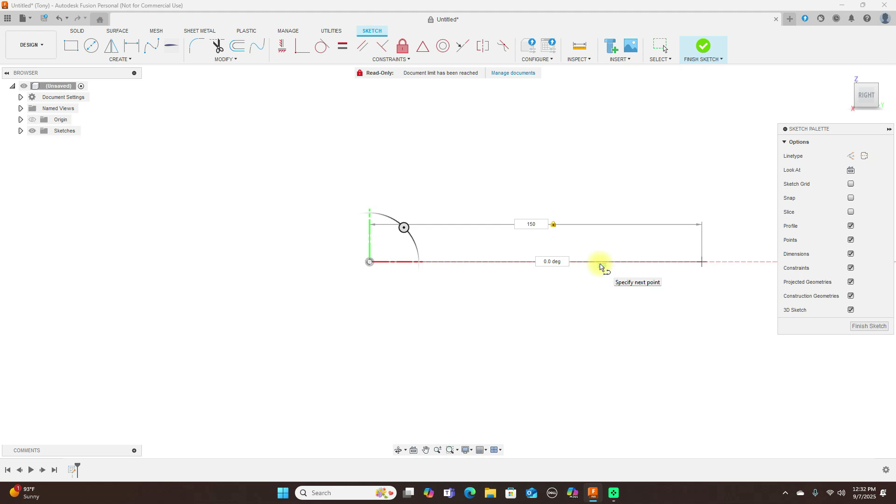Now, I don't know what's going on here, why the line is not staying here for me. I just figured out that's why—I forgot to hit the left mouse button. Sorry about that, but anyway, let's continue.

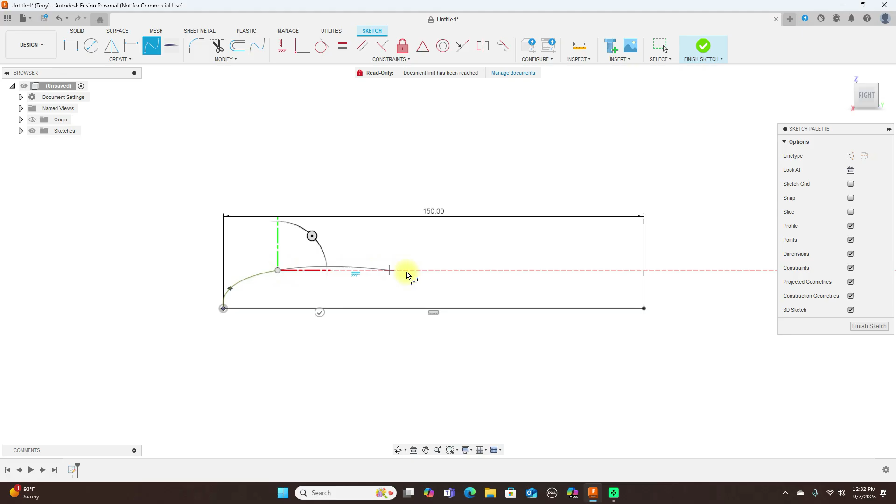If you have the profile you want to use, go ahead and use your wing profile. Like I said, this is just an arbitrary one to show you guys the easiest way to do this. Okay, we have our wing profile. Go ahead and finish the sketch here.

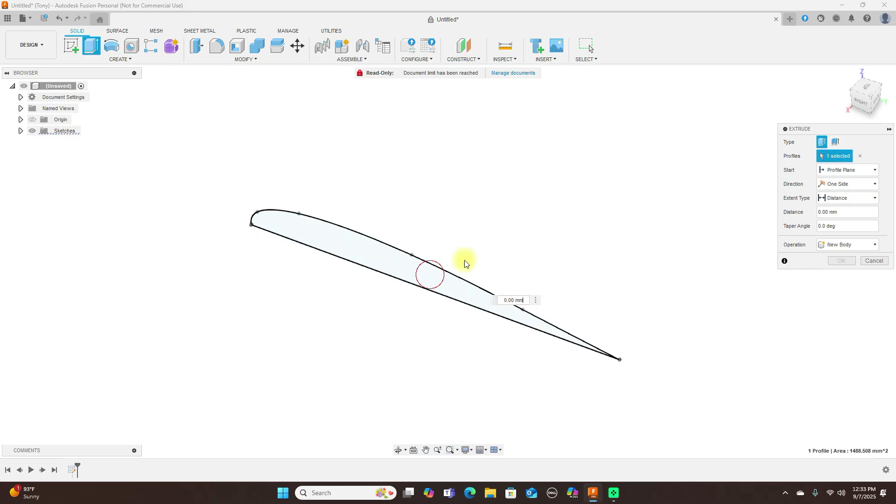Then we're going to go ahead and extrude this. It was already selected, but no worries. I want to make this the same thing, 150 millimeters. Okay, here's our wing. Just that simple.

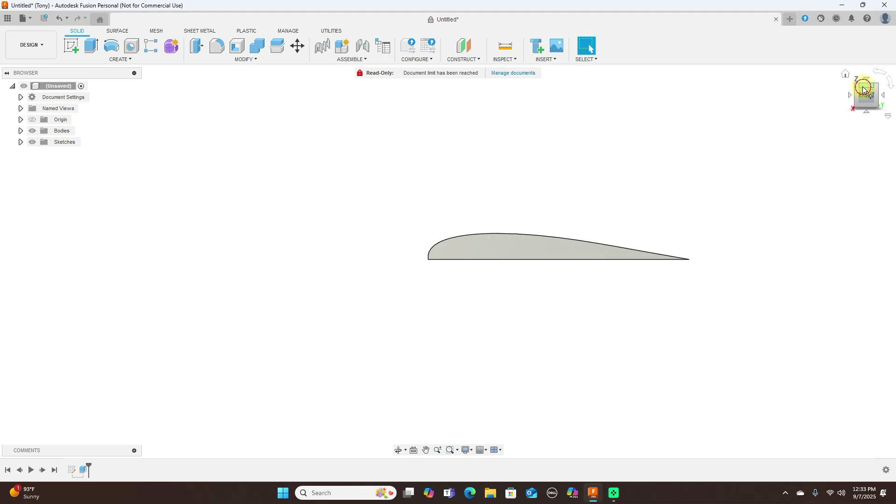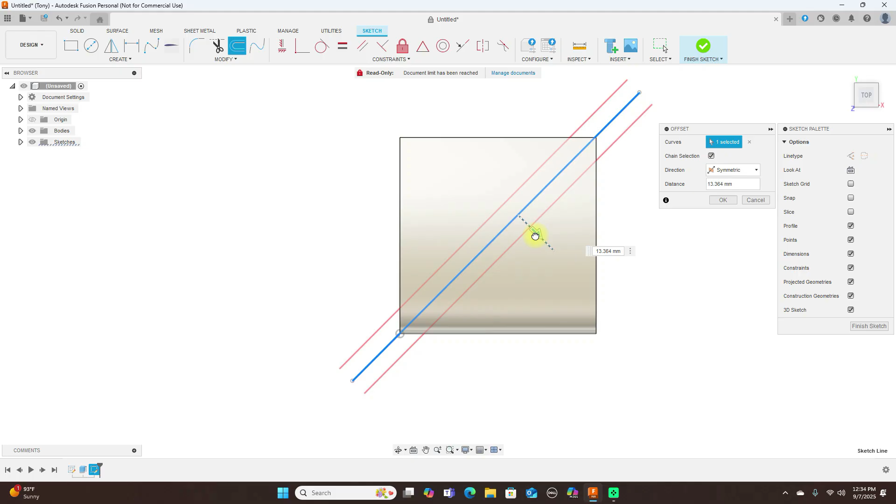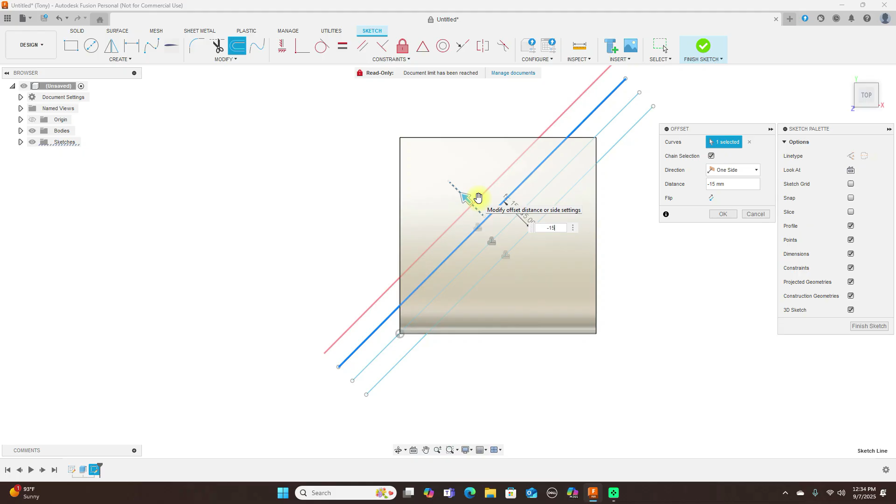Now create a sketch on this plane here. I'm making the internal structure now. I'm just going to change this to symmetric and spread these out. Let's go for 15 millimeters, and make this a -15. Click OK, right click, repeat. And again, -15. Just keep repeating this until you have as many as you want.

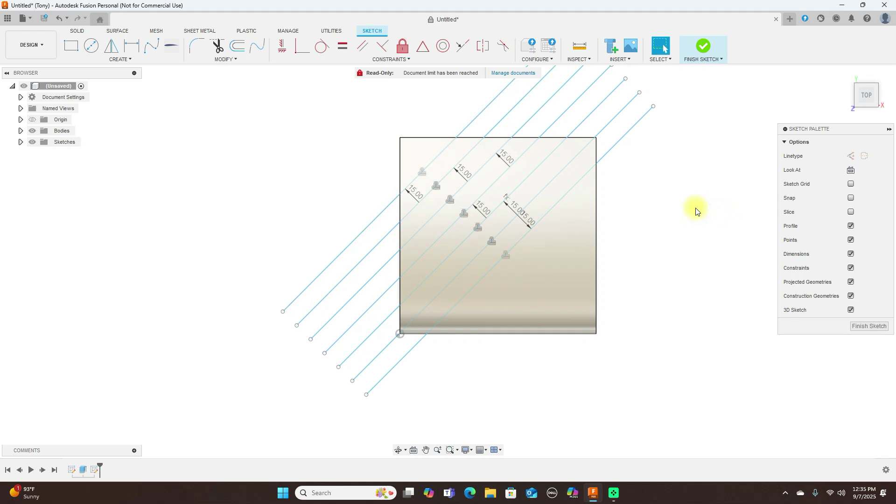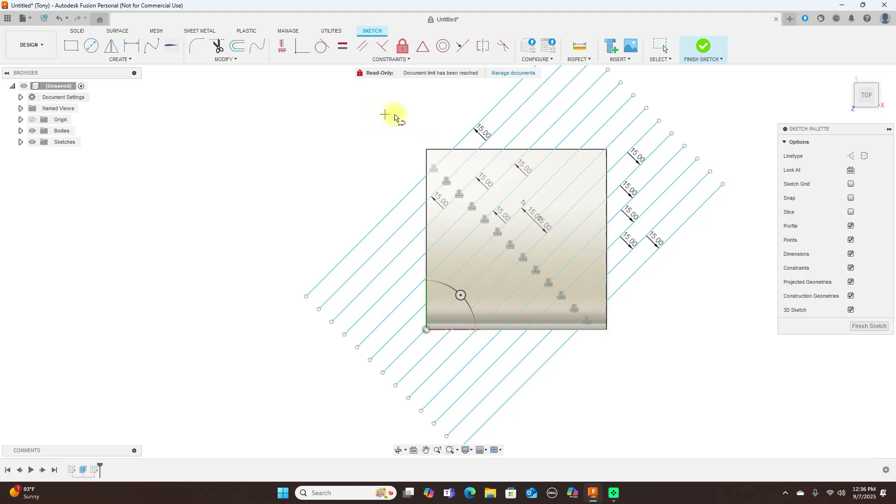Right click again, repeat. Okay, now we have that. Same thing here—we're going to offset this line here, and make this symmetric.

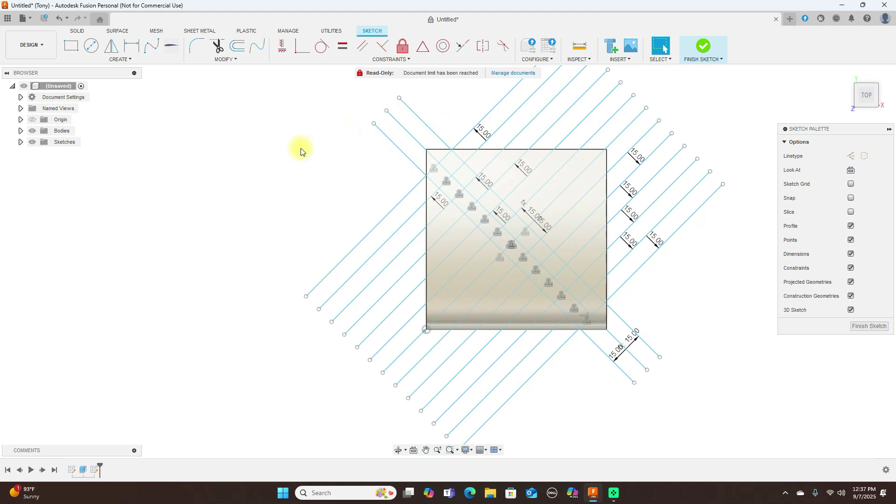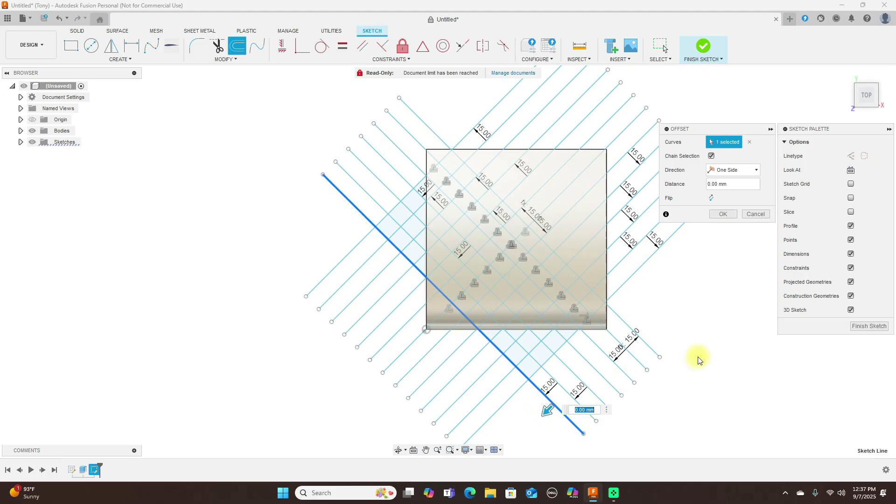You probably won't need all these formers like this, but just add them. The more you put in here, the wing will be stronger, but it will weigh more. So when you design your wing, do some experimenting and see how many formers you'll actually need to get the strength you're looking for.

Like I say, a lot of people make a big deal about this, and it's not difficult to do anything like that.

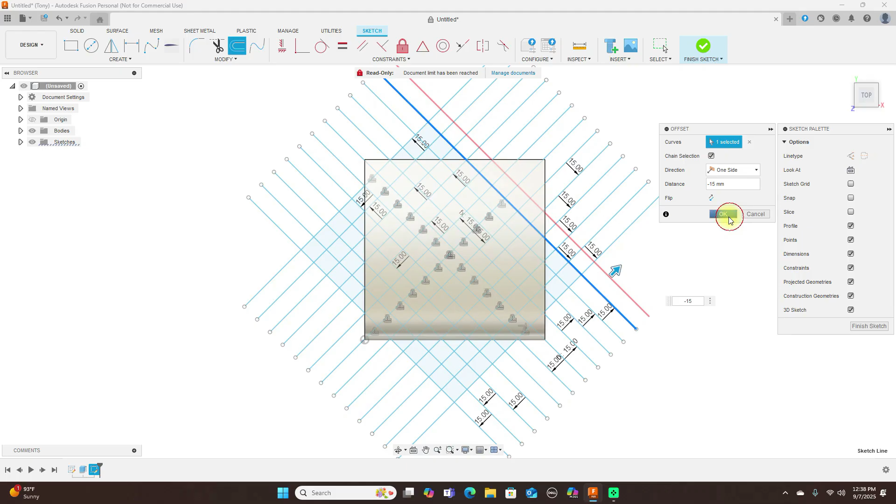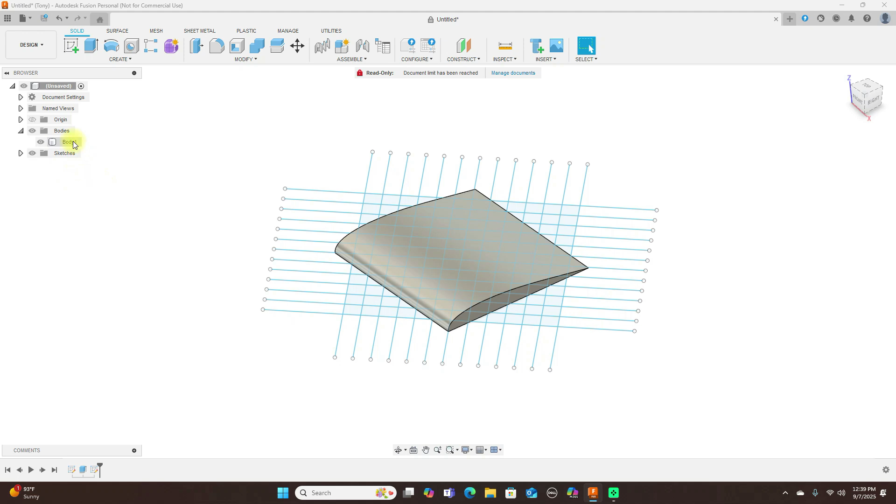Okay, now I'll go ahead and finish sketch, and we can turn off the wing. Go ahead and change this to wing, turn that off, and now we're going to use an extrude. Change this to thin extrude, and then select all the lines.

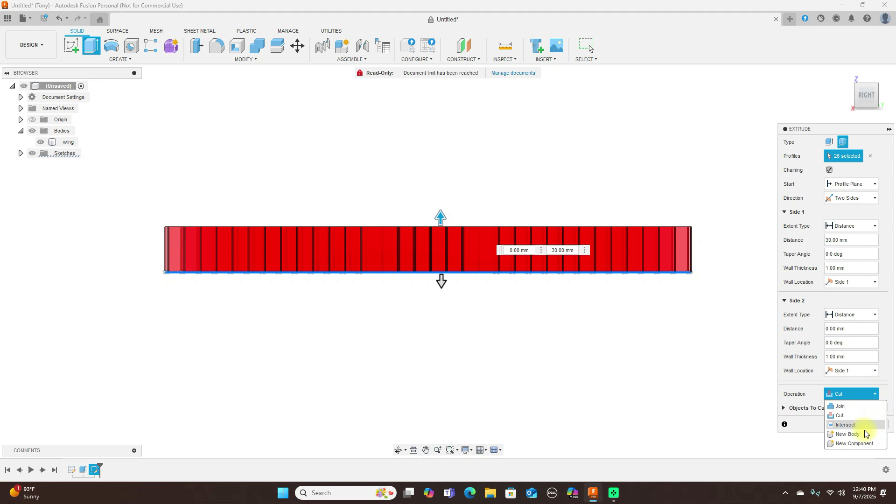I'll turn the wing back on so we can see here, and change this to two sides here. Pull this up, change this to new body, and pull this one down. Click OK. Here we have our structure and the wing inside of there.

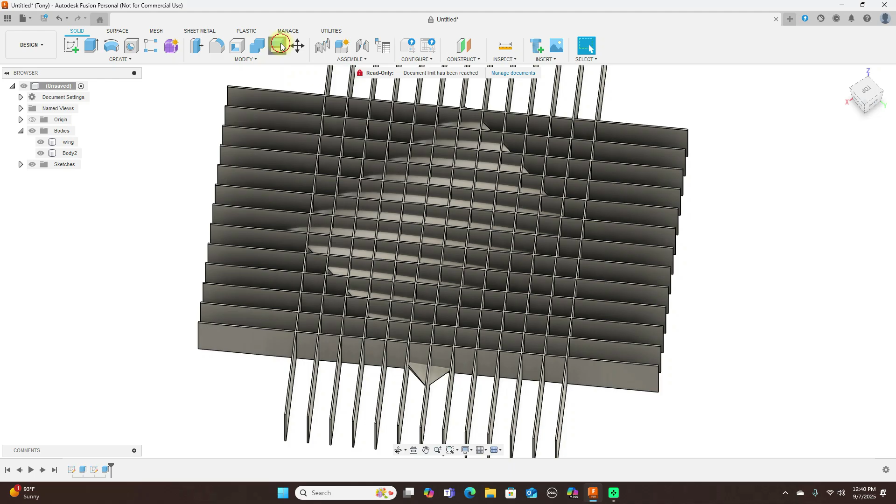And that's that. So now we're going to split body. The body to split is this, and the splitting tool is going to be the wing inside of here. Click OK.

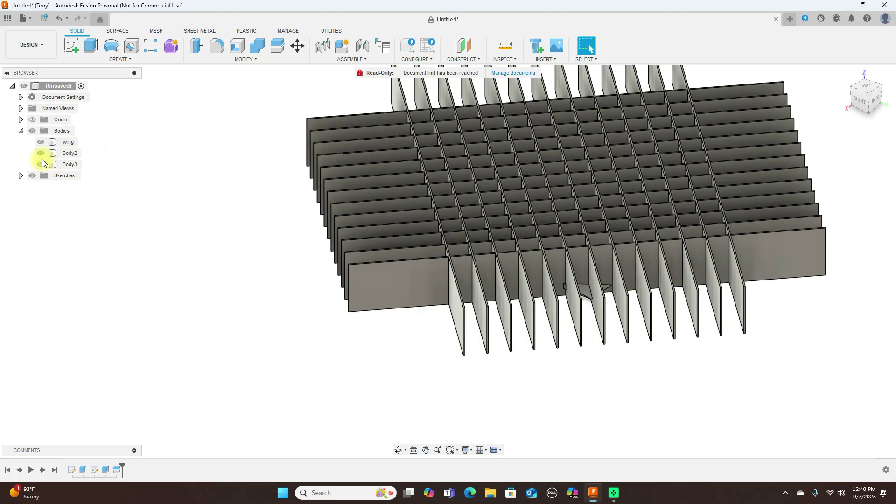And this is our formers, so change this to formers. Here is our wing with our formers inside. So if we turned off the wing, you see the formers there.

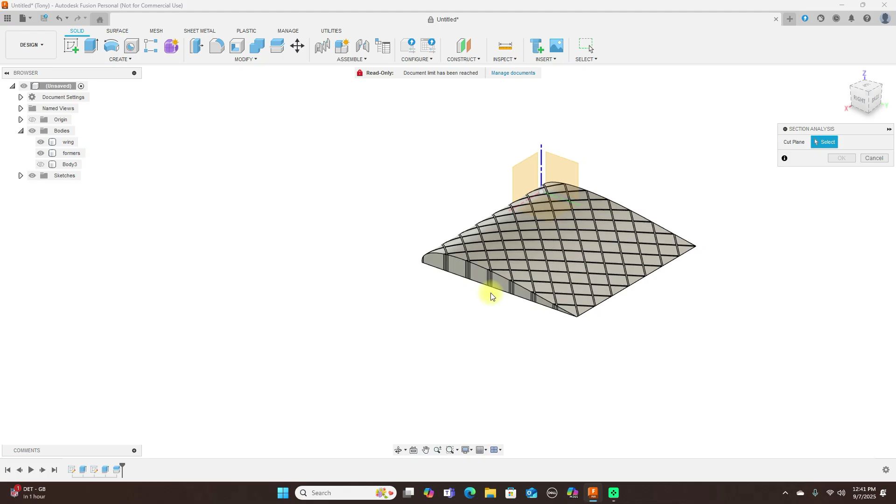Now, this wing is still a solid, and I'll show you that with section analysis here. As you can see, the wing is still solid. We haven't shelled it out yet. Go ahead and hit cancel here.

Let's turn off the formers, and we want to shell this out. And when you shell this, you want pretty much whatever your nozzle that you're printing with, would be 0.4 millimeters or 0.6 or whatever it is. You want to pretty much stay right around there. You don't want to go less than that for the thickness of your walls.

So I've come to the point where 0.5 prints really well all the time. So I just stick with 0.5. Now, you can use 0.4 and see how that prints for you, but I just find that 0.5 works for me, 0.5 millimeter thickness. So we'll just go ahead and use that.

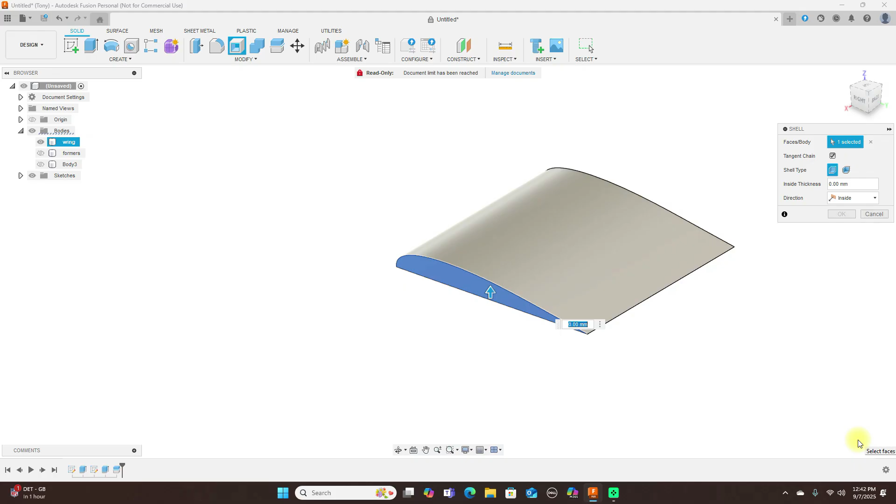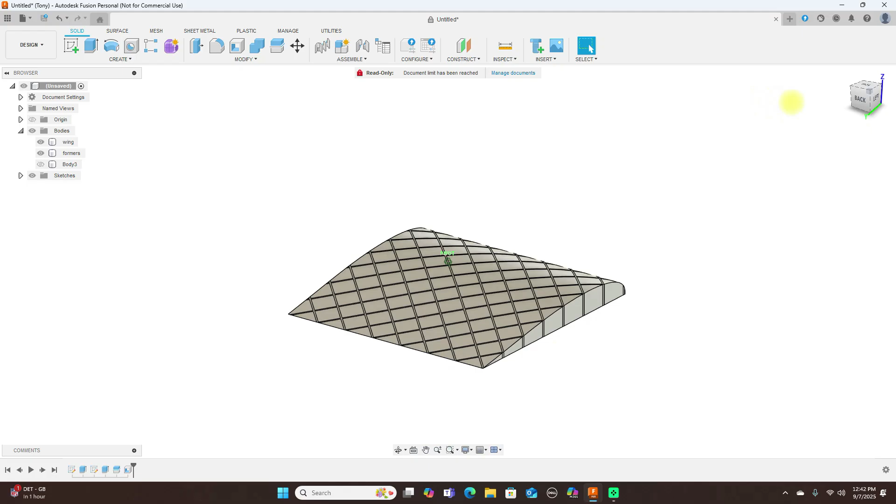And we have that. So we can turn the formers back on, and then you'll see inside here.

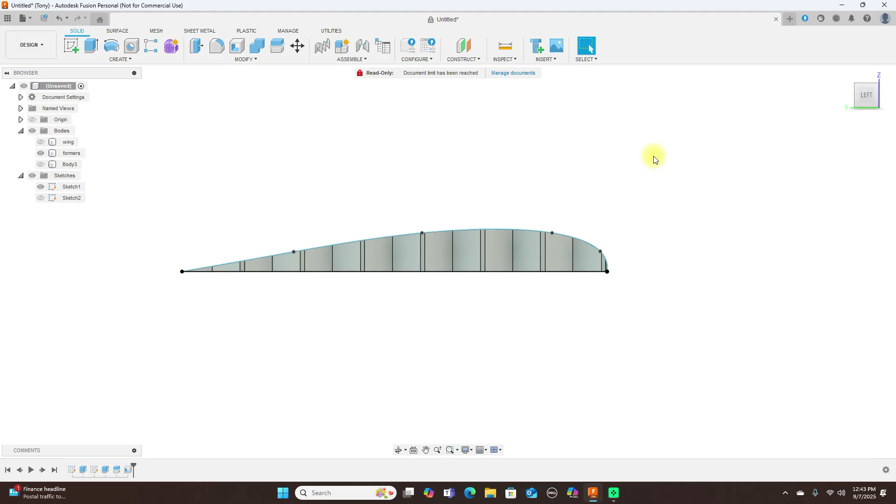Now to get this even lighter, we'll put holes in here. And well, let's first go ahead and put our wing tube in here. So we're going to create a sketch on this plane here.

And the wing tube, you want to put it right around where your CG is going to be on the wing. And normally the CG is 1/3 back from the front. So the CG is pretty much going to be somewhere right in here. You want to get all that done first, figure out where your CG might be on your wing. Or you can just guesstimate, but pretty much it's around 1/3 back.

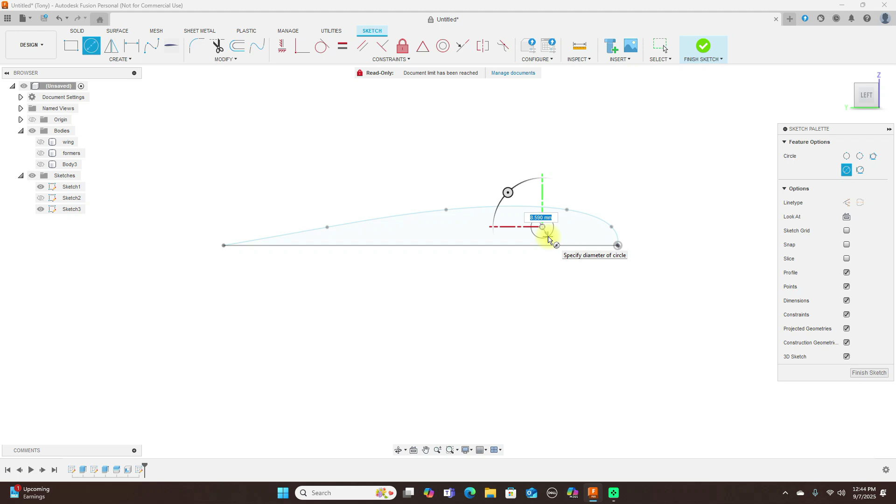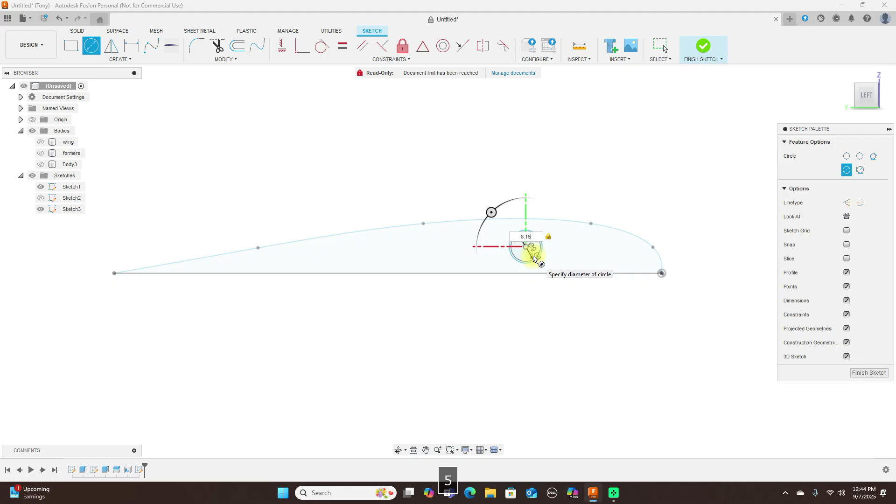So my thickness of my wing tube was 8 millimeters. So I'm going to make this about 8.25. No, 8.15, I'm sorry. Just so the tube slides down in here.

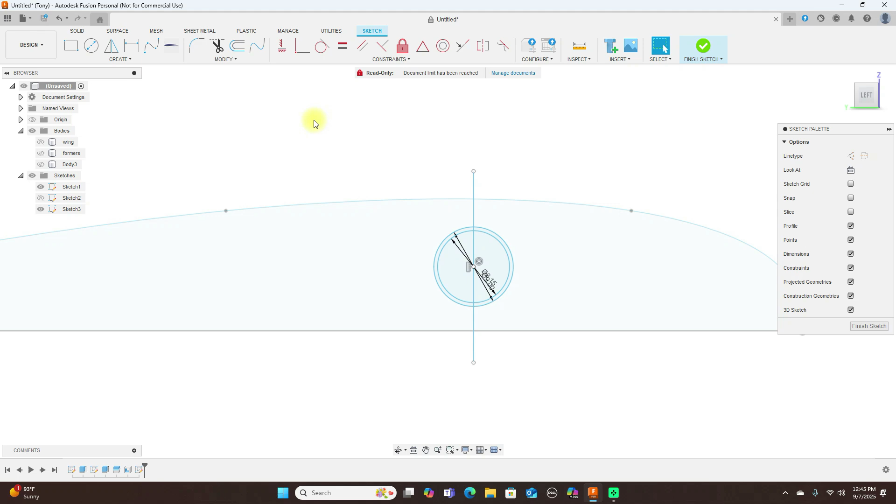Now I'm going to create a line here. Then just offset this, change this to symmetric. And I want this to be pretty much 1 millimeter. So I'm going to have each side 0.5. Click OK. Then here's a line. Click OK. Same thing at the bottom here.

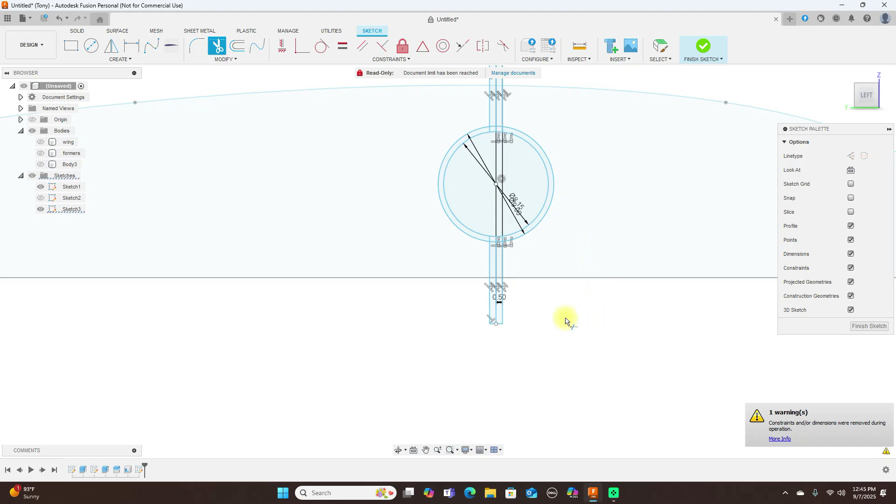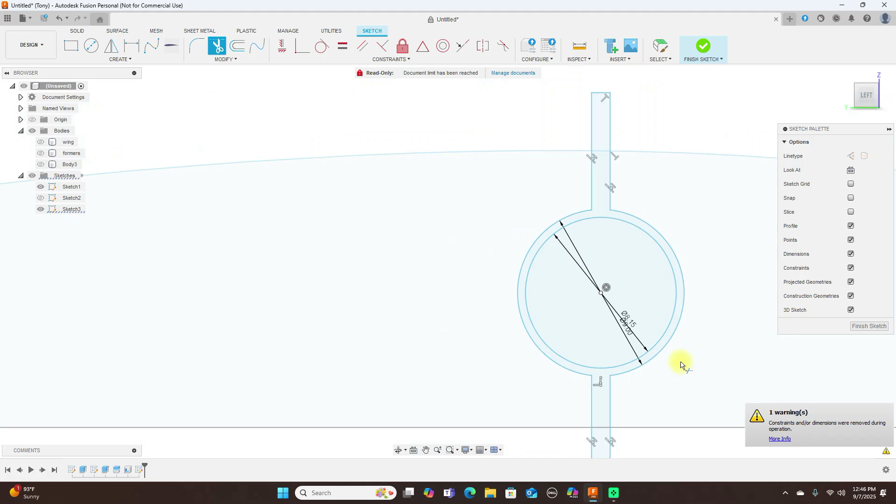Now I'm going to use my trim tool and get rid of these 3 here, this center one. Okay, now we got that too. Go ahead and finish sketch.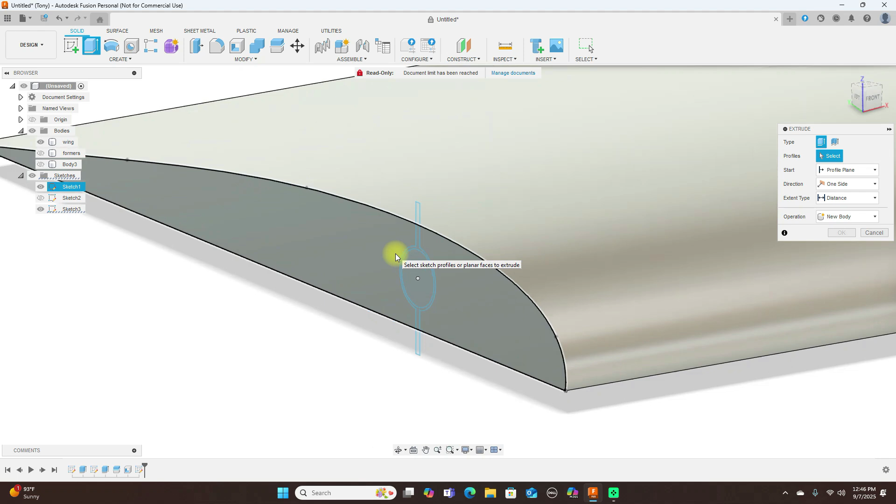Turn the wing back on, and now we're going to use an extrude. I'm going to extrude this. And change this to new body. Click OK.

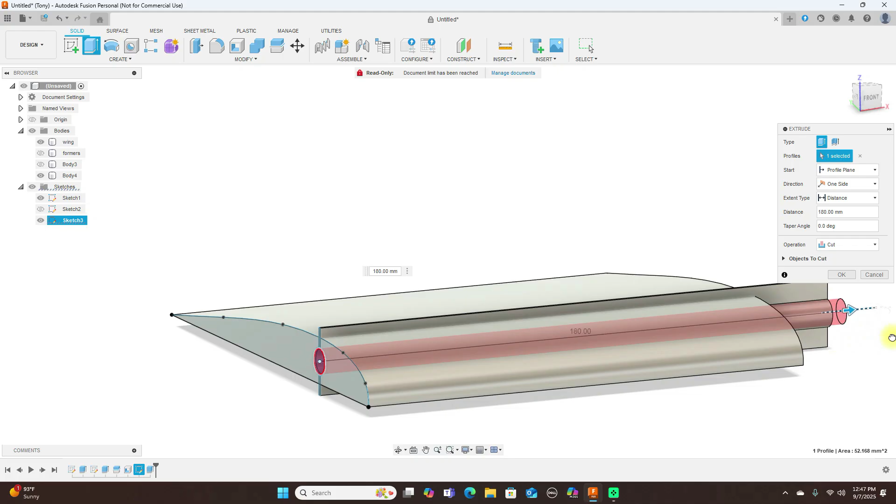And here we're going to use an extrude again. Turn the sketch back on so I can extrude it, and that. Move that all the way through there and click OK. And that is for our wing tube.

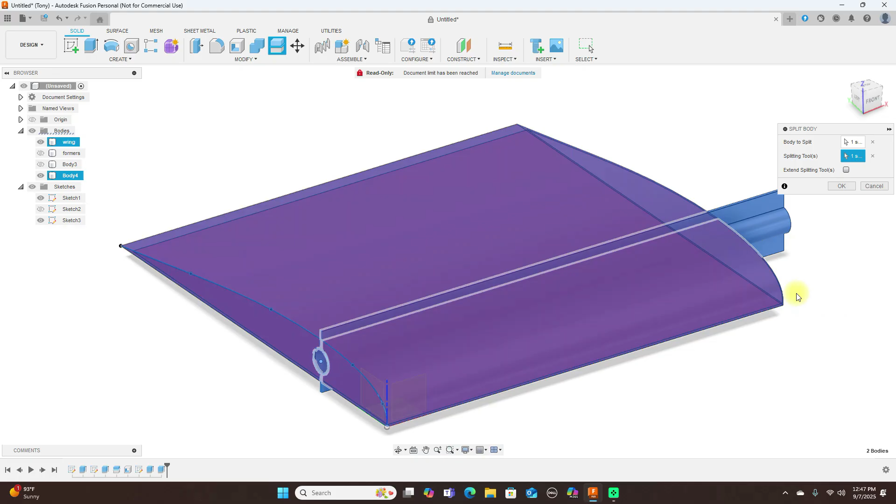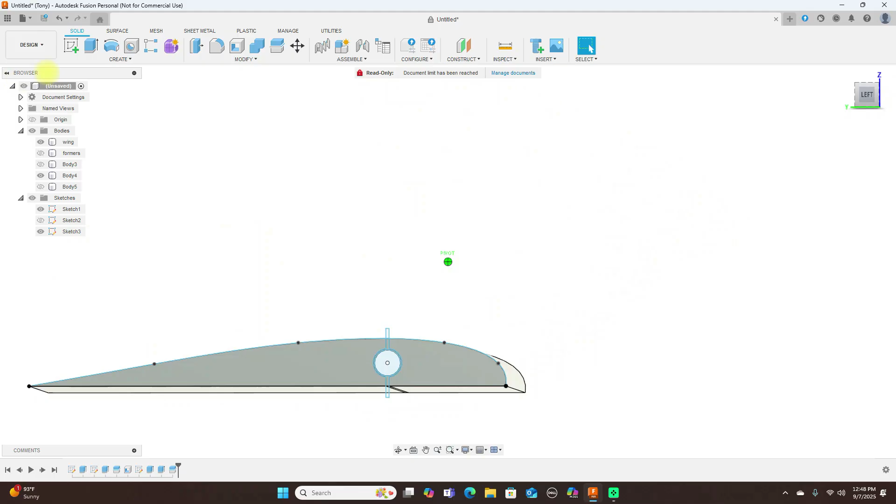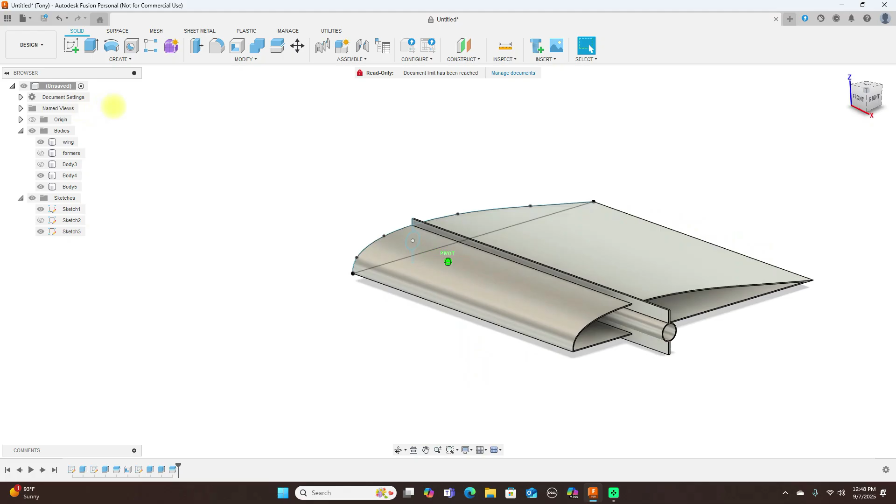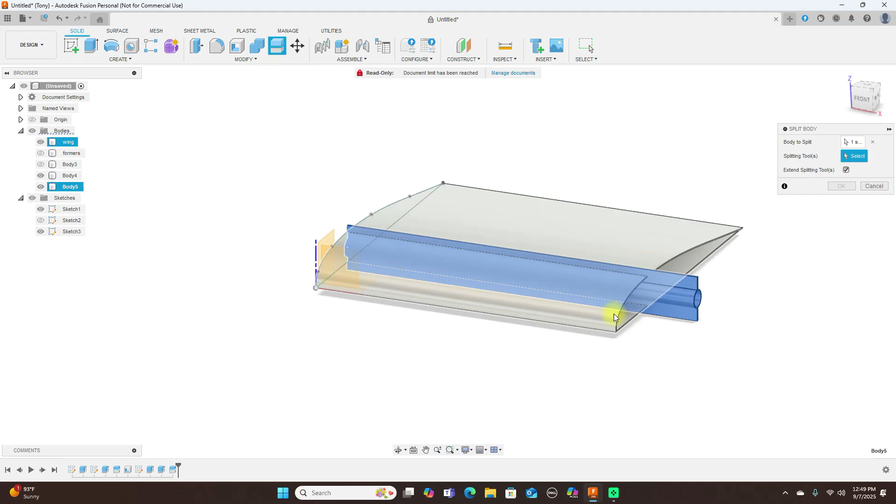Now, let's see here. Now this did not split this. Okay, cancel this. So what I'm going to do here now, this won't let me split this because this is sticking out and this is hollow here, so cancel this.

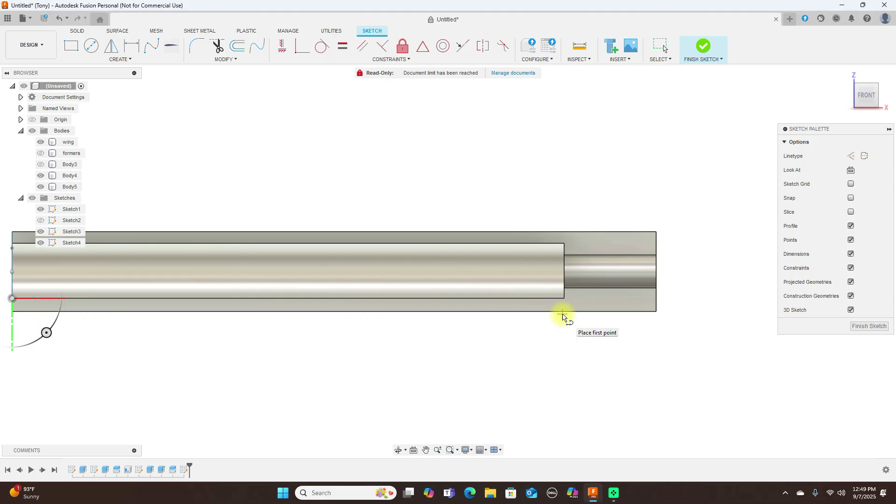And what I'm going to do is create a sketch on this plane here. It's a line. And I'm going to use a line to split this. And now we can split this.

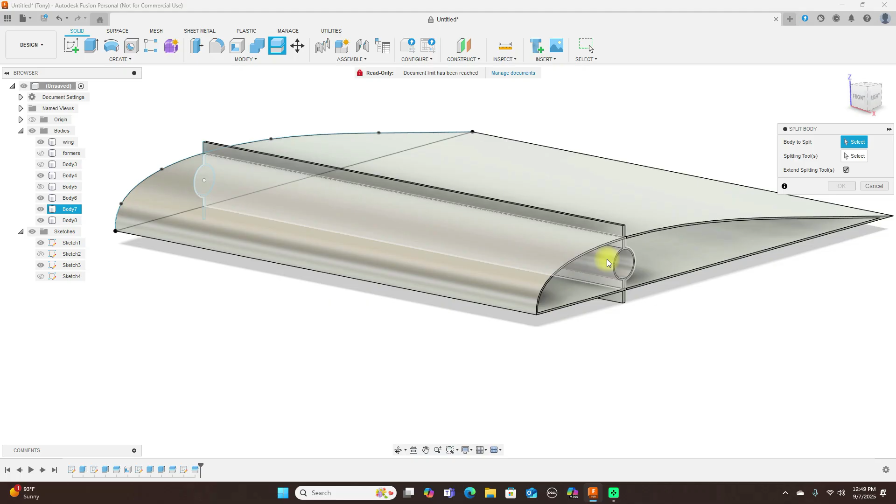That's already done for me. Cancel this. Okay. And we have our wing tube in there too. Turn the formers on.

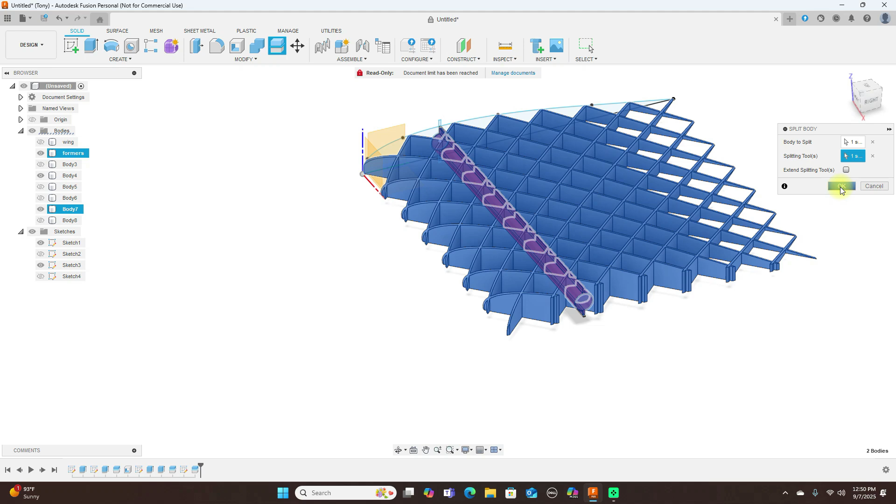And now, going to use split body again. We want to split this and this wing tube sleeve. What we're going to use. Well, actually, what I can do, cancel this.

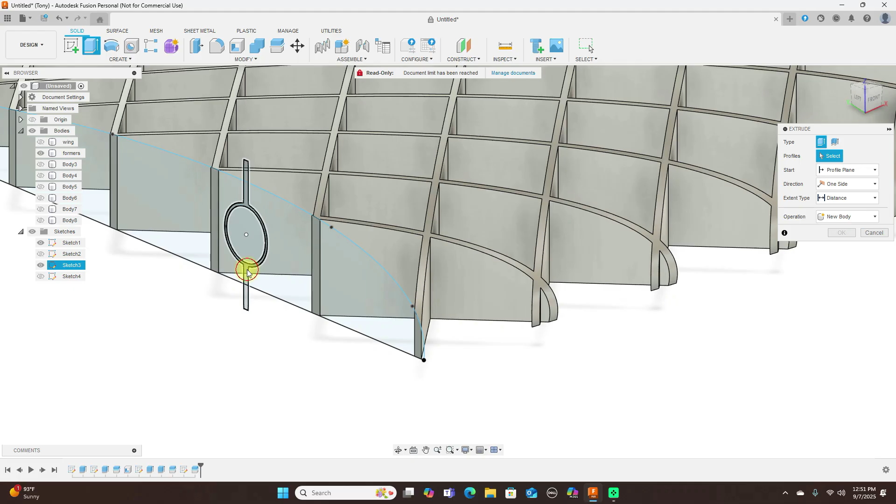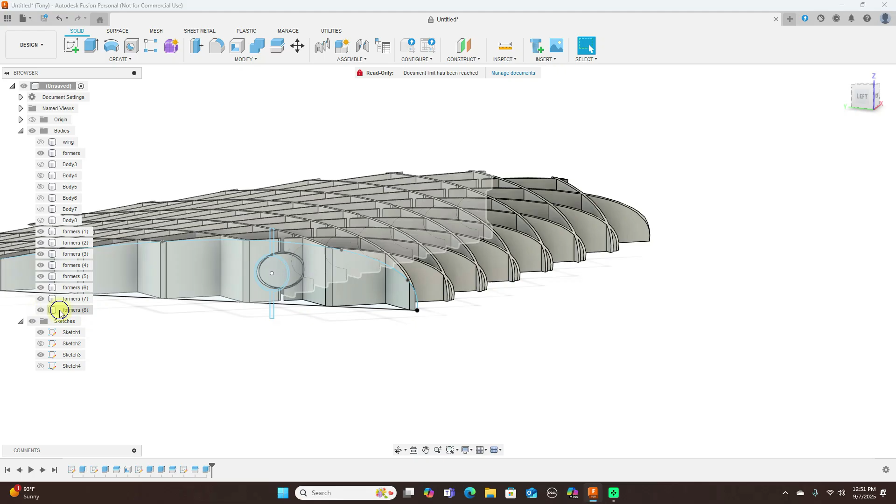Turn this off. And use this to cut all the way through. We have that. Now we just turn these off. Actually, we don't need them. Oops, wrong one. Okay.

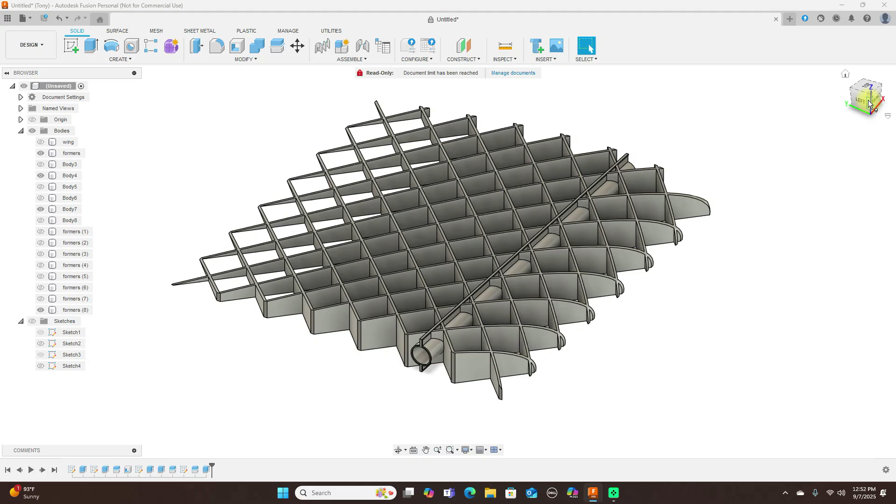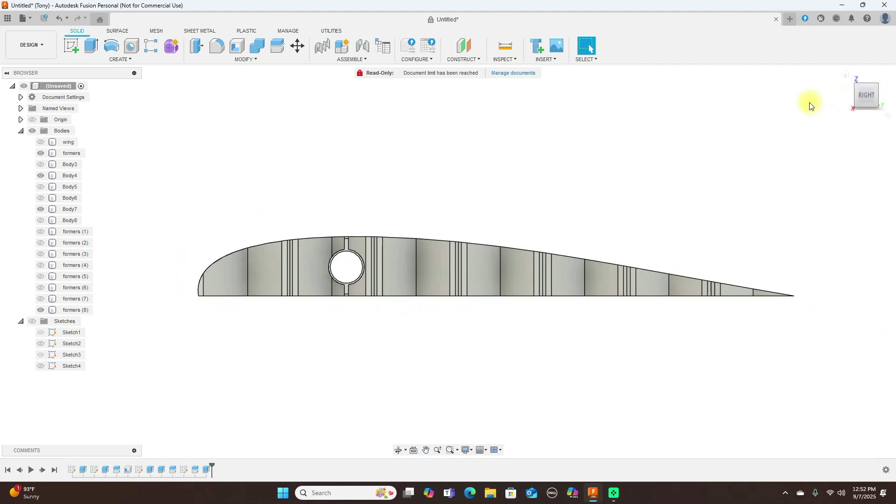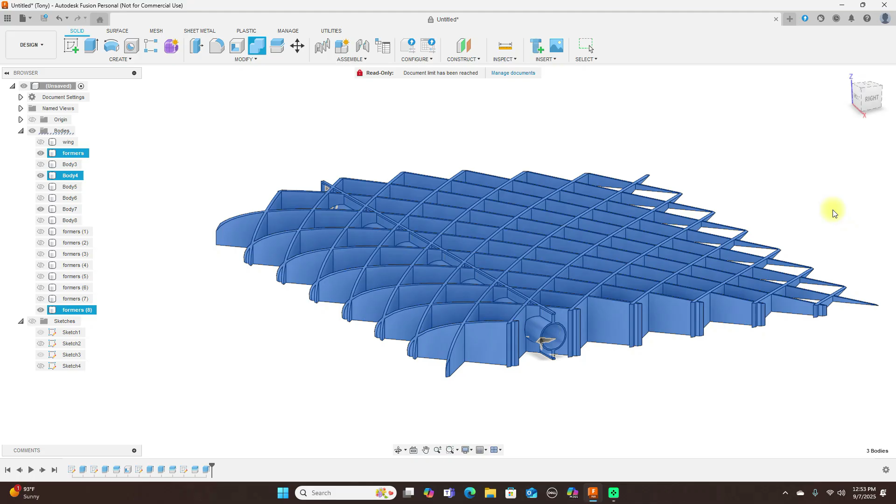And we have that in there now. And I want to combine this with this in here. So combine this, this. Okay, now we have all that combined. And our wing.

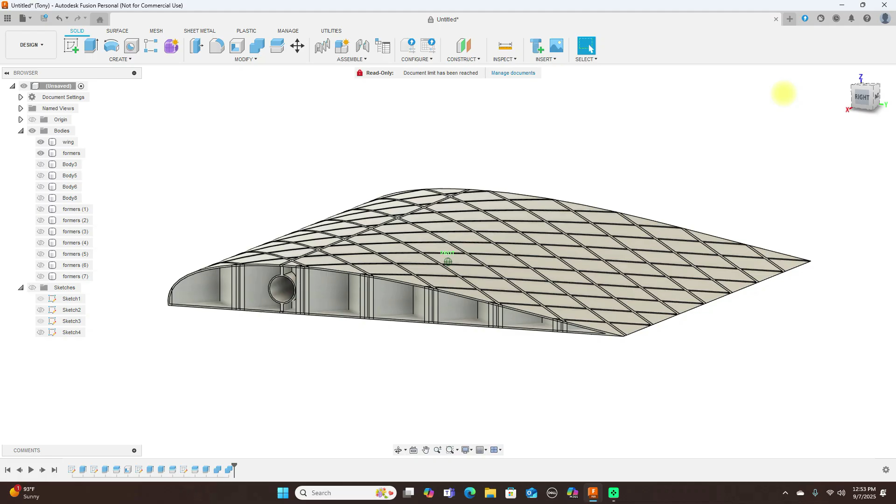And as you can see, this is not difficult to do. And now I want to create a sketch on this plane here to actually make this lighter even. You can use whatever shape you want for this, whether it be an ellipse type shape, but I'm just using circles here.

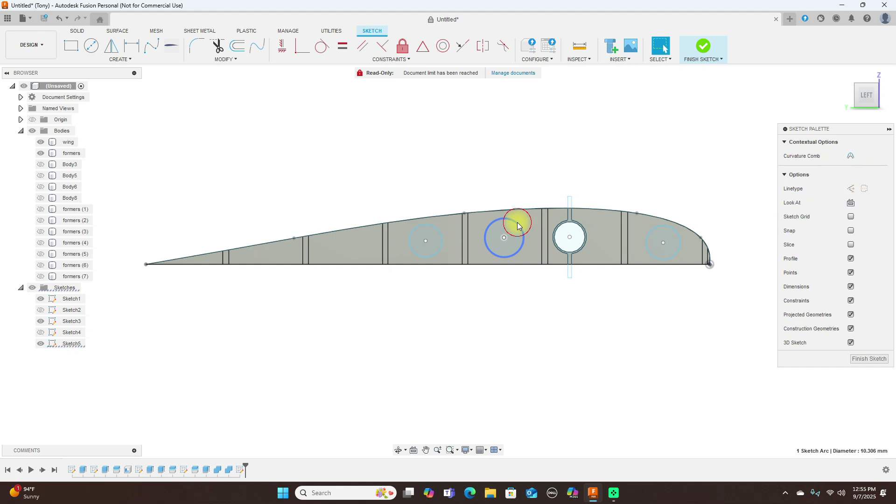I would like to use, let's see here, let me cancel this. Delete this here.

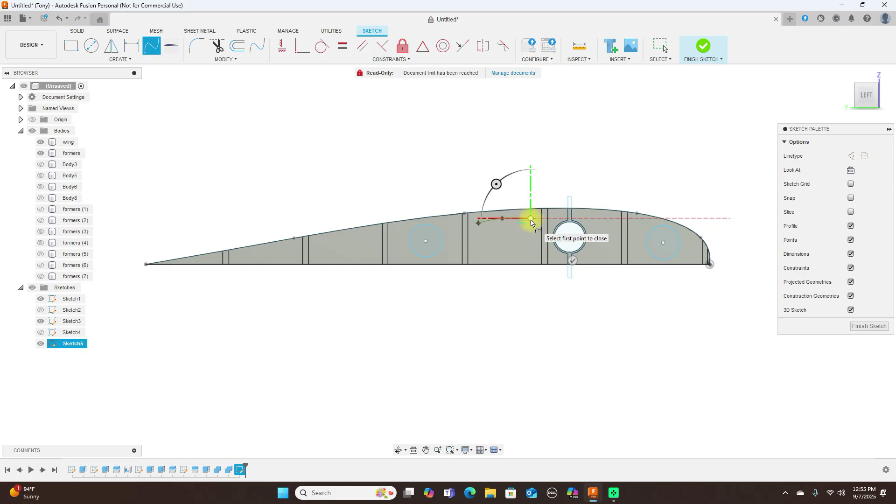To get the maximum weight savings out of something like this, and to keep this strong, I'm going to try to remove as much of this as possible and still retain its strength. So I would do something like this.

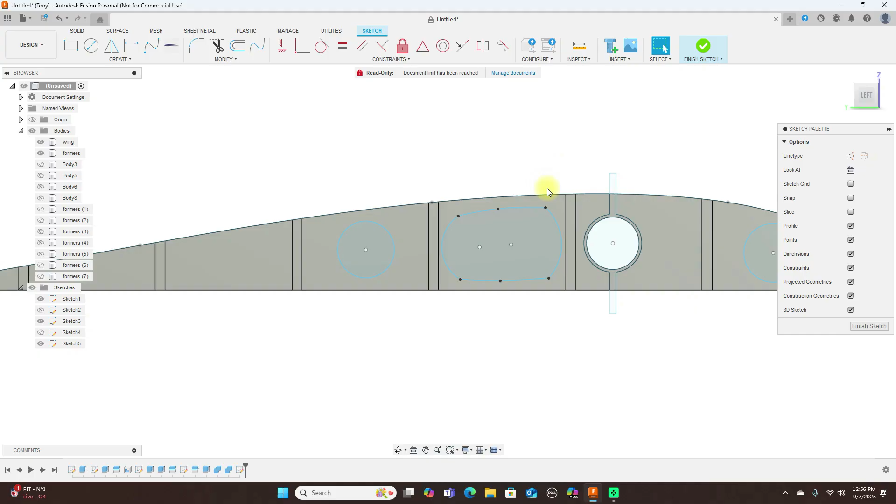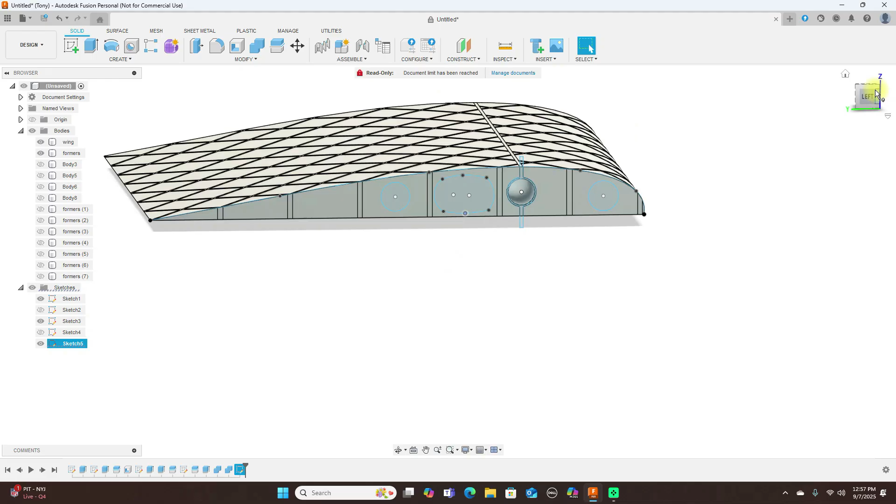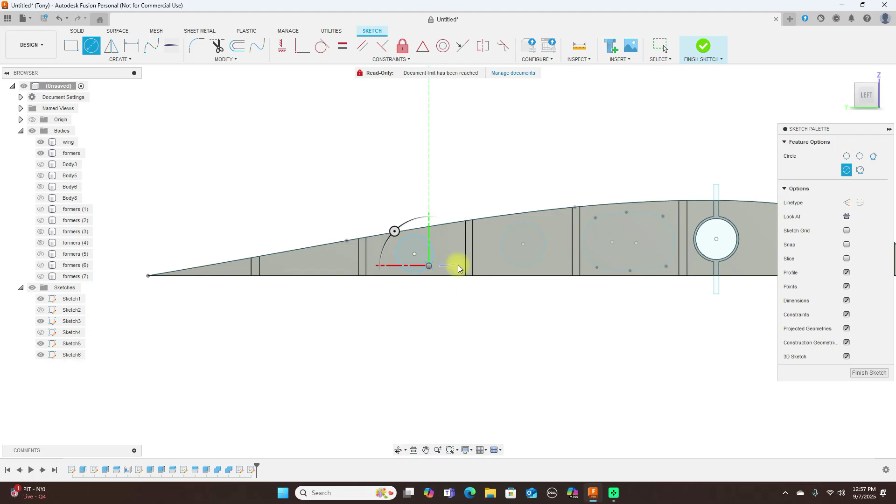Then adjust these around until it'll get the shape you want. But for time's sake here, just go ahead and put circles, and go ahead and finish sketch here.

Then I'm going to use an extrude, this shape here, and pull that all the way through. Then we have that. I'll cut the wing off, and this is what the internal structure looks like.

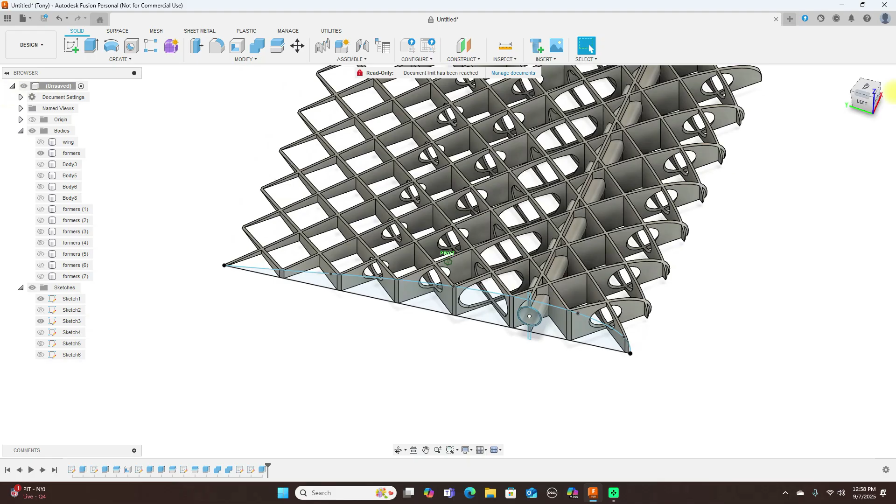And when I extrude it here, let's go back and take a look at this. Not that one. Okay, this second extrude here, what I did.

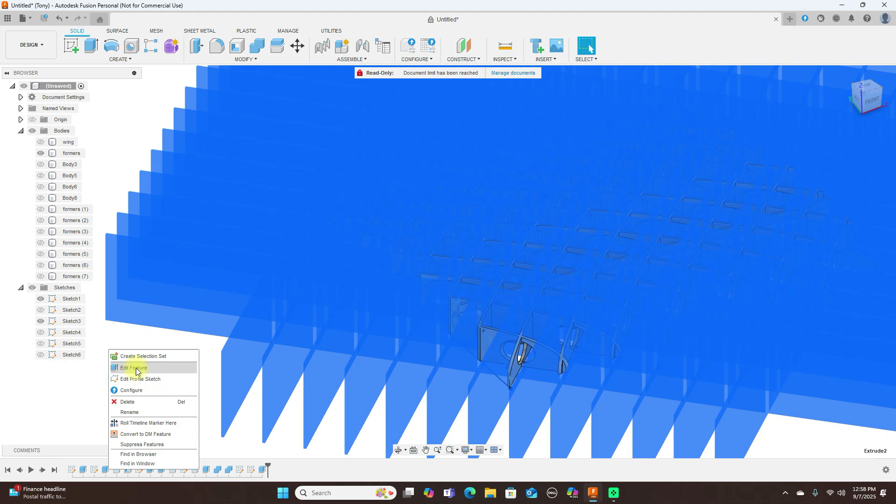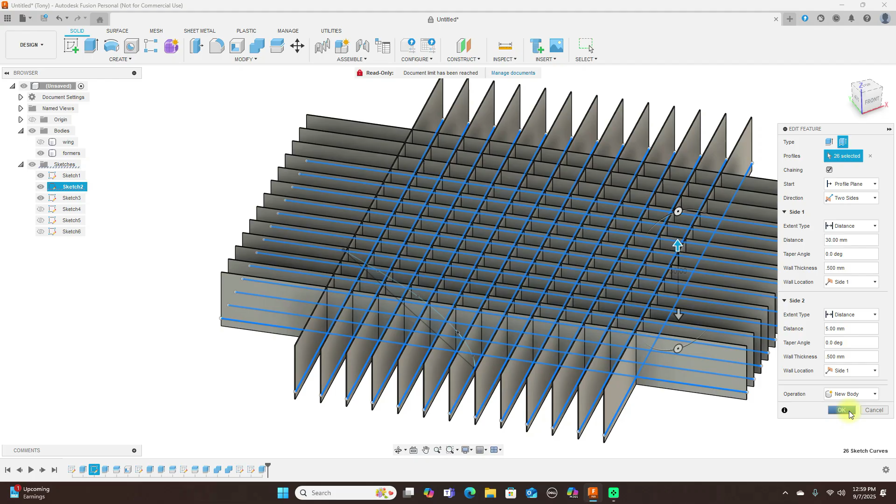Now the thickness of these, the wall thickness of each one of these extrudes, you want to make them as thick - again, 0.4, 0.5, and 0.6, but 0.5 seems to be optimal for me. And this one down here too, change it to 0.5. Okay, now each one of these ribs in here are 0.5 thickness. That seems to work the best for me when I'm printing and gives me the lightest parts.

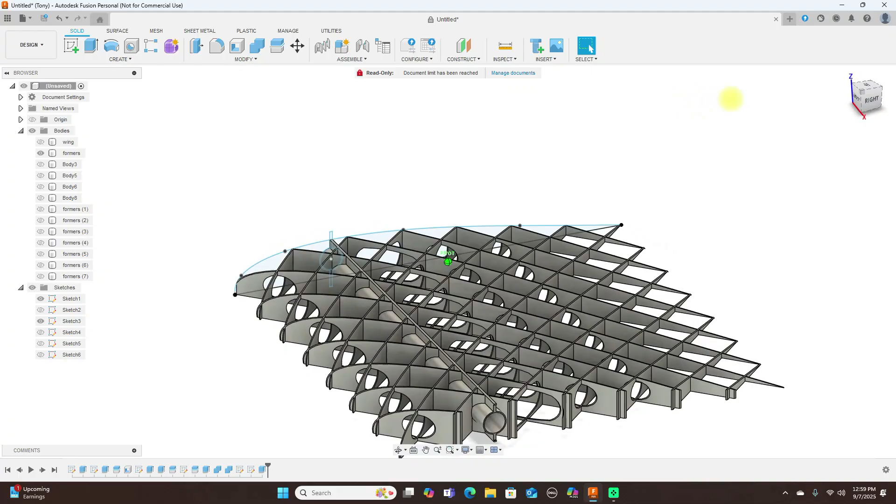So now we have our wing. And now what we do is just combine the two. And here's our wing. Just that simple.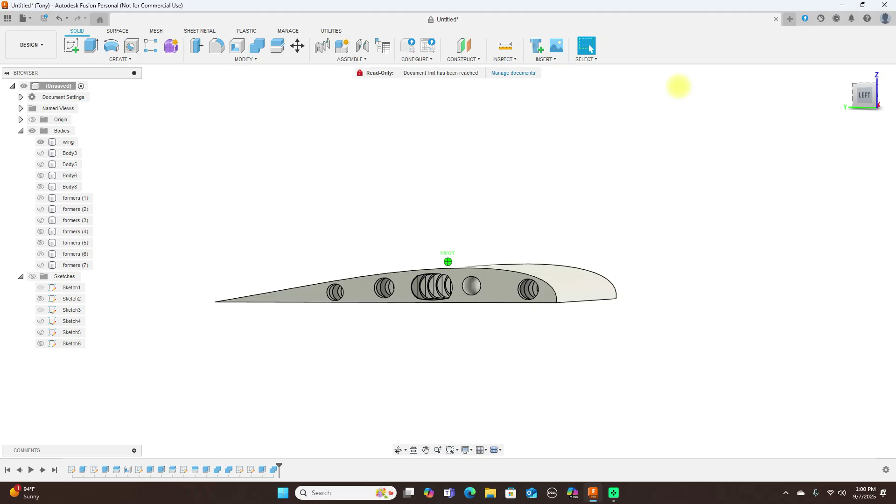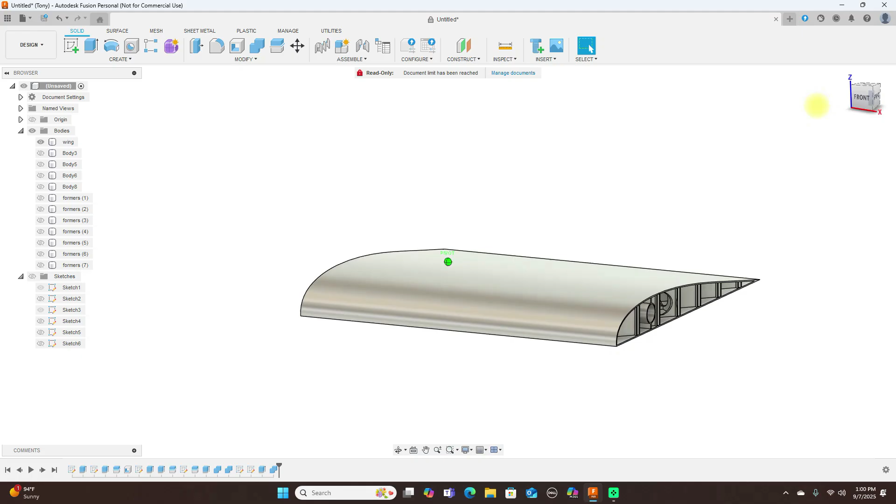And if you want this side over here, the side covered, I'll just show you how to do that real quick here. Okay, I'm just going to put a plane here. Let's see if we can do a plane at an angle. Change this to 90. Click OK.

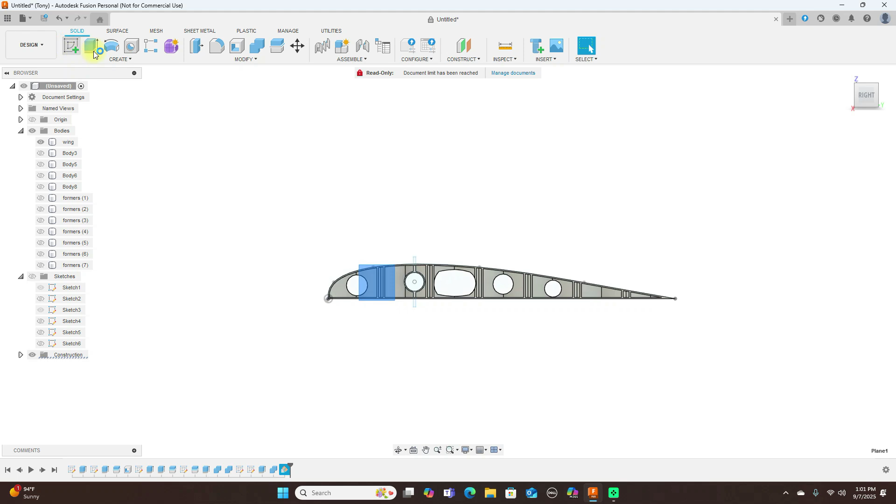Create a sketch on this plane here. Then we're going to project. Project that, click OK, finish sketch. Turn your sketches back on.

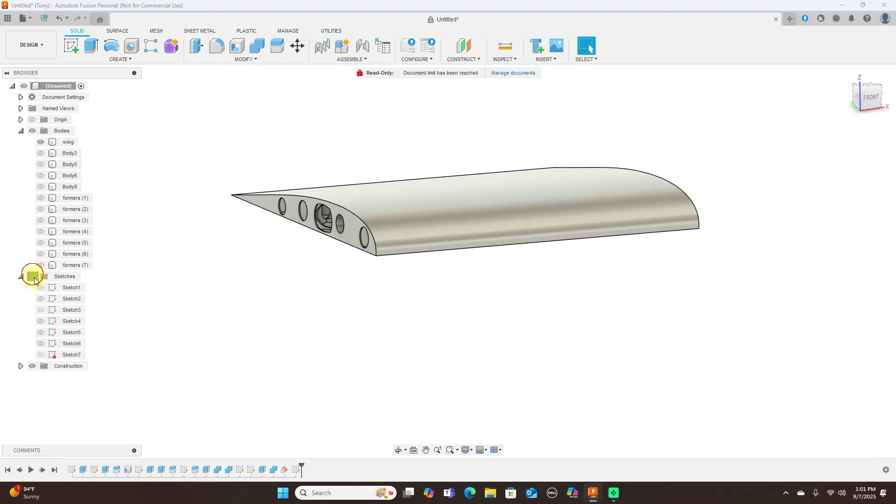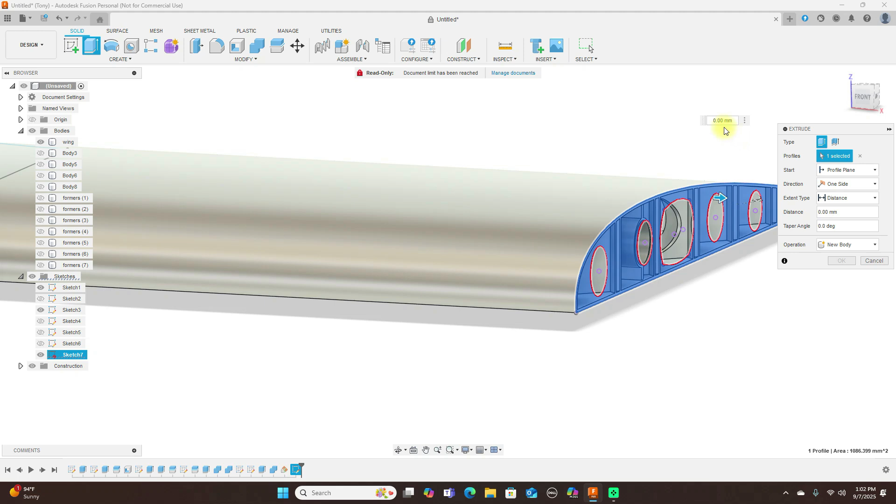Now use an extrude, and we want to extrude this. And I'm going to extrude this 0.5. And join it and click OK. And you have that there now.

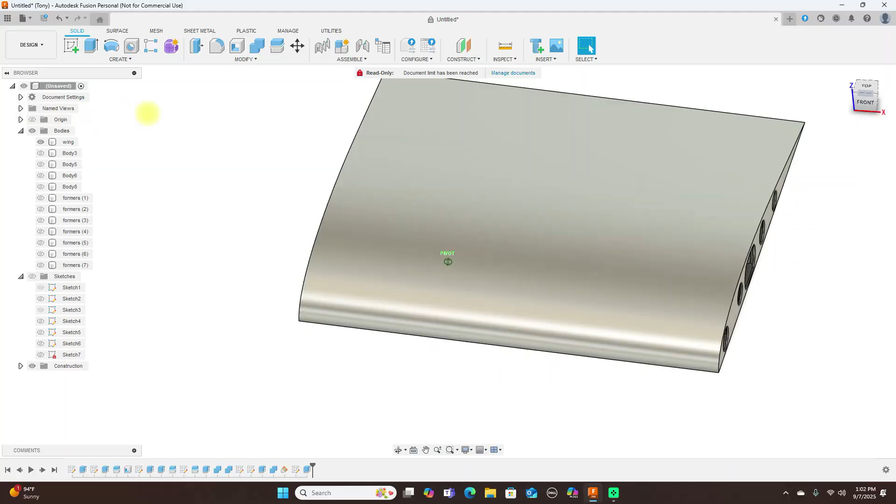And this is the simplest way that I know of designing a wing, that you can get really light wings like this using lightweight PLA. And your wing is really strong too. And it's just that simple. Next time I show you guys how to do this, I'll show you how to design the wing so you can print it in vase mode and get the wing even lighter. But this here is pretty much it.

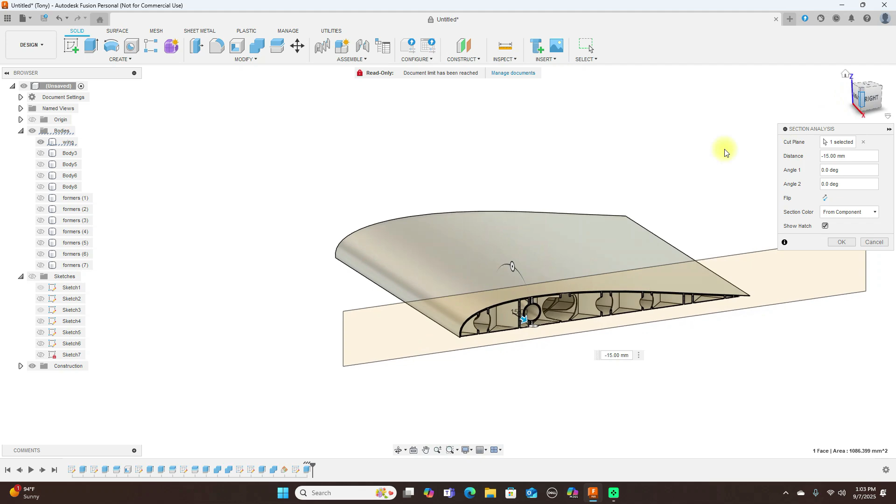So again, let's take a look. Section analysis, this side here. And you can see that's our wing inside. And as you can see, this is all solid, this section here. Just that simple.